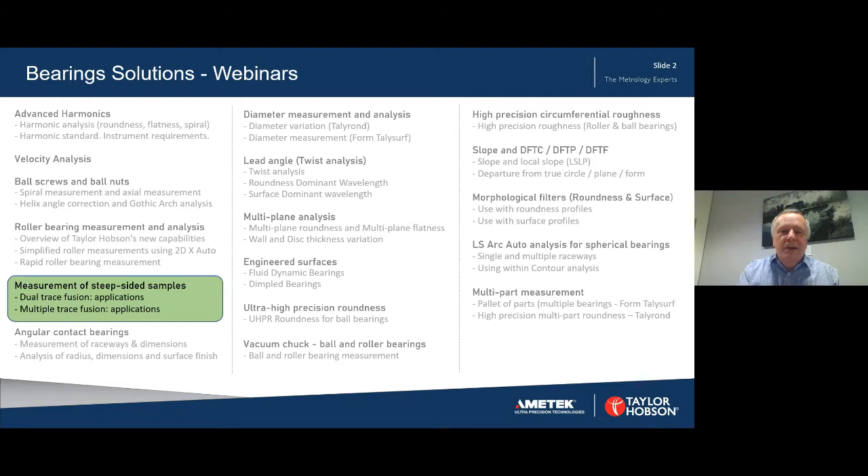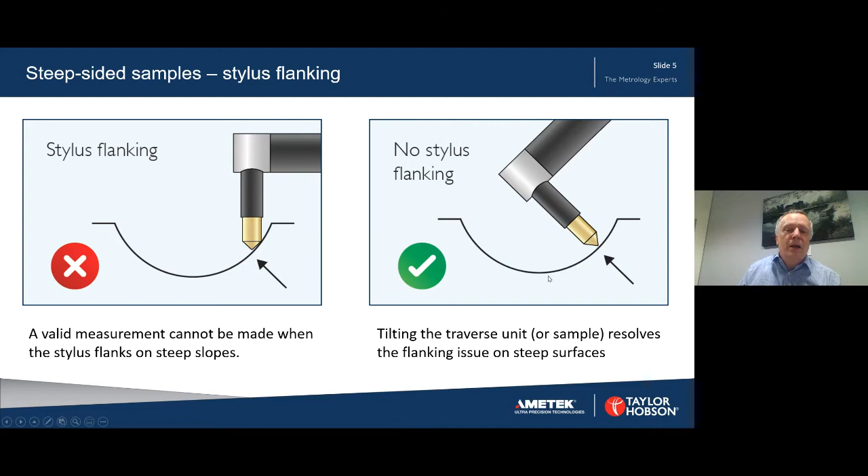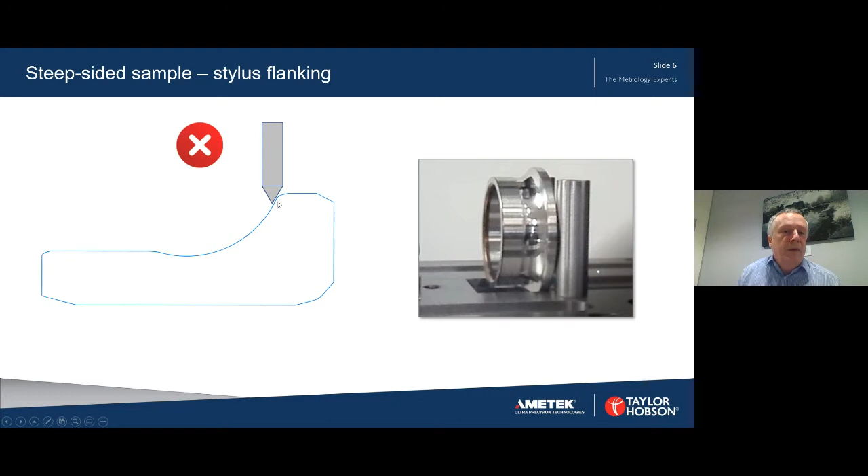So here's an example. This is an angular contact bearing, and in this case we've got it mounted horizontally, and you can see the same thing has happened again. The stylus will have been able to measure along this section here, but when it reaches the right-hand side, flanking will occur, and so the results that we get will not have any meaning. So what do we do? Well, the simplest solution in this case is just to tilt the sample. In this case, we've tilted it at about 45 degrees, perhaps 35 degrees there, and it allows us to measure all the way along the top surface, along the surface here, onto the bearing raceway, and then onto the steep section as well. And let's just have a look at that in practice.

So here's the stylus starting to measure now. And as it comes onto the raceway and onto the steep section, the stylus is able to measure that very steep part of the slope. The important thing to note here is that we're only dealing with a steep slope on one side.

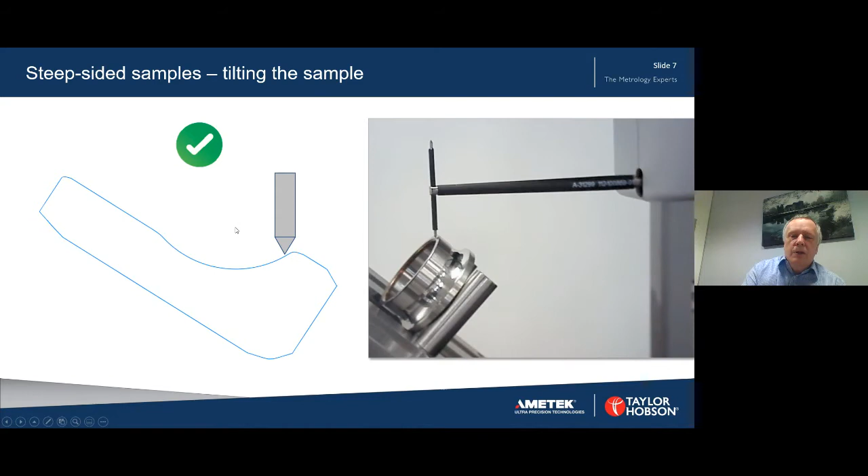So the question is, what happens in other situations where we've got two sides which have very steep slopes? And you can see that in this example here. On the right-hand side, it's very steep, and on the left-hand side. And what we've done here is to tilt the Traverse unit, and obviously we'll be able to measure from the left, just left of center, over onto the right-hand land marked at B.

Well, what we can do is rotate the sample through 180 degrees, and then that allows us to measure the other side. So we've done two measurements. The first measurement from A to B over center, and rotate it 180 degrees, and another measurement. Now, combining those measurements and using Taylor Hobson's Metrology 4.0 data fusion software, we're able to fuse the two traces together. And so this allows us to measure steep sides.

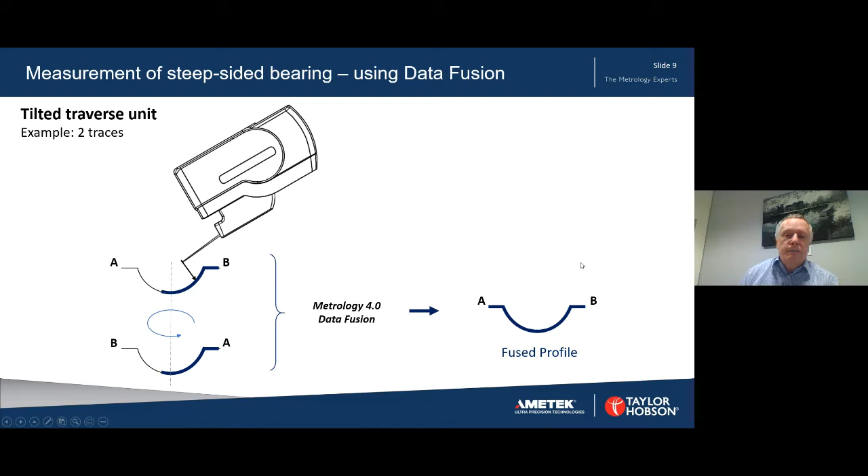Things to think about here are the stages that are used. They need to be good quality stages and well aligned, and the type of fixtures as well. We also need to think about what we're using as datums. Sometimes we may need an external datum on the fixture. The Traverse unit angle chosen will depend on the sample itself, as will the choice of stylus. The PGI Novus system from Taylor Hobson allows us to align samples very, very well. And the smaller the sample, generally, the more important is the alignment.

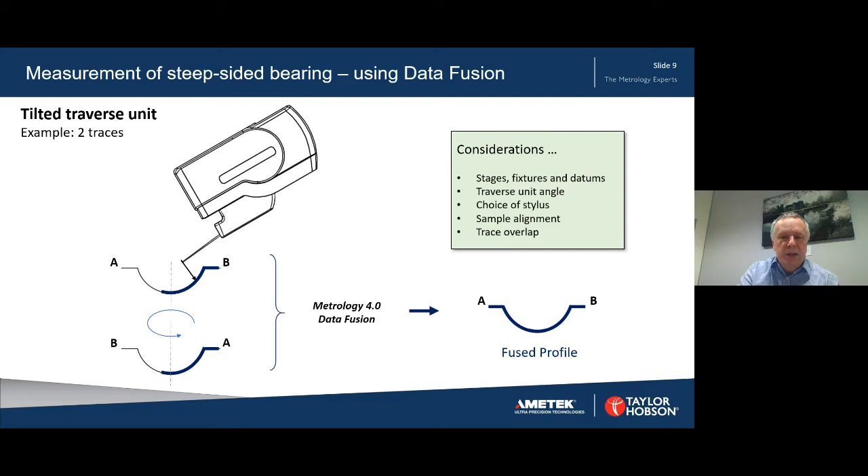The other consideration is how much overlap to do at the center. If we don't go over the center on our measurements, then we won't be able to join the traces together. So there's an example of tilting the Traverse unit and fusing two traces together using data fusion software. We'll now have a look at another example where instead of tilting the Traverse unit, this time we're going to tilt the sample.

And this is a groove in a surface. It could be a sealing surface, for example. And so it's an example of a region on a sample that cannot be measured in a single trace due to stylus flanking. In fact, it's even more difficult than the previous one we looked at, at least it looks like that. It's got 90-degree slopes on the left-hand side and on the right-hand side.

So the interest here is in measuring the width, the drop, the height, and some of these angles as well of these chamfers, and the depth of, and the fillet radii as well. So we want to measure the whole part, but really, even if we were to tilt it at 45 degrees, we'd only be able to measure one side at a time. But by fusing it together like this, we can achieve what we want.

So what we do is we tilt the sample as shown here, and we're able to measure this side. And you can see we've got a tick marked there showing that this data is valid. In this case, this data is not valid on the right-hand side. So that's tilted the sample anti-clockwise.

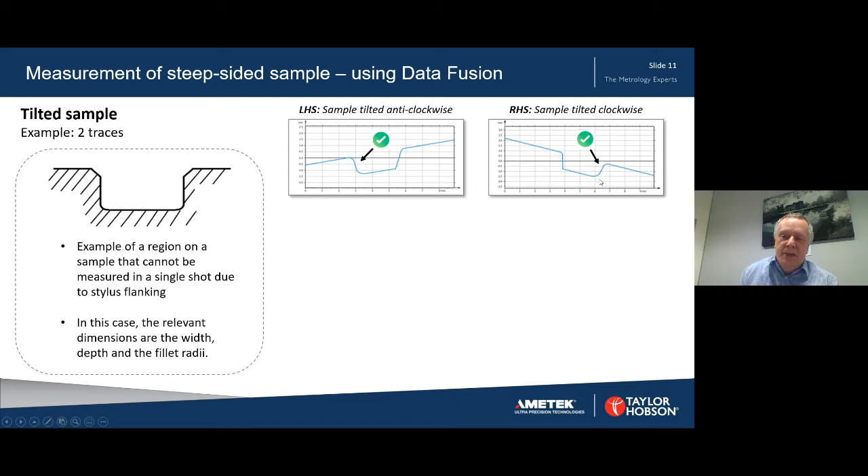We now repeat the process and we tilt the sample clockwise, and we're able to measure on the right-hand side here, the right-hand side of the slope, that data is now valid, and the data on the left-hand side is not valid. Using data fusion software, we're able to combine these two traces together to get exactly the result we want. And here's the completed profile.

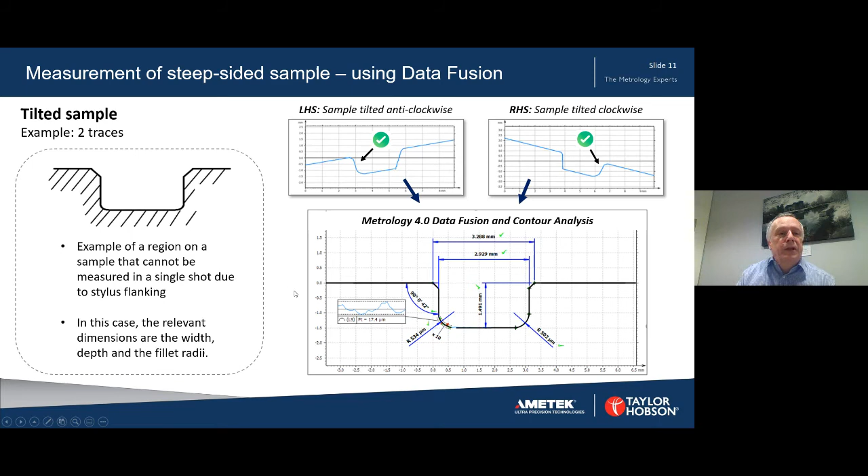So we're looking at the distances, we're looking at angles, we're looking at the fillet radii, and also you can just see there we've got some tolerancing done, and we've toleranced the fillet radius, and we've looked at the form error. In this case, it's showing it's 17.4 microns. So this example was tilting the sample. So we've looked at tilting the traverse unit, and we've looked now at tilting the sample.

So now, finally, we're going to have a look at the demonstration of using the data fusion software. And in this case, we're dealing with some very steep-sided grooves, between 70 and 80 degrees. And these are the sorts of grooves that could be used in a typical fuel cell, but not necessarily just that application. It could be many other applications, anything with steep sides. But the central region is quite big here and quite flat. And so instead of fusing two traces together, in this case, we're going to fuse three traces.

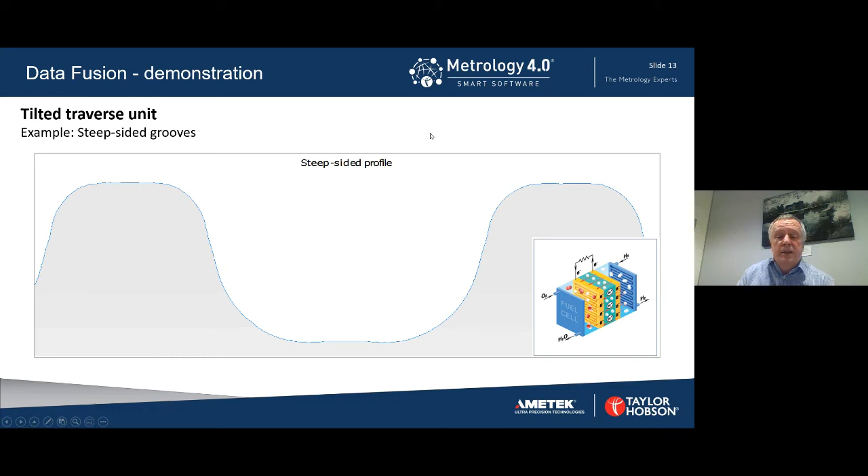And what we're going to do is to take three traces, one with the traverse unit horizontal, and we get this result where this data that I'm pointing to now in the center is valid. And then we tilt the traverse unit again at about 30 degrees, and the data on the right-hand side is valid. This data is not valid. And then we rotate the sample and we measure again, allowing us to get the data for the left-hand side.

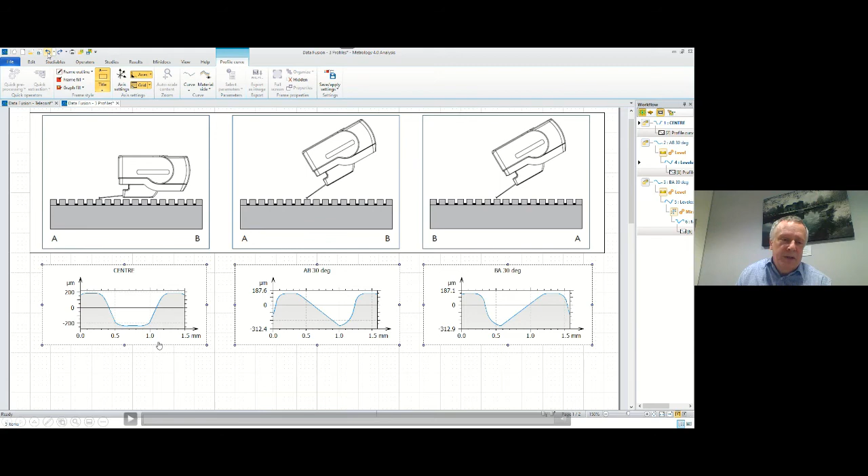So we've got three pieces of data that are good: the central trace here, the right-hand trace here, and the left-hand trace here. And what data fusion does now is to fuse these three together. And we'll just take a look at that.

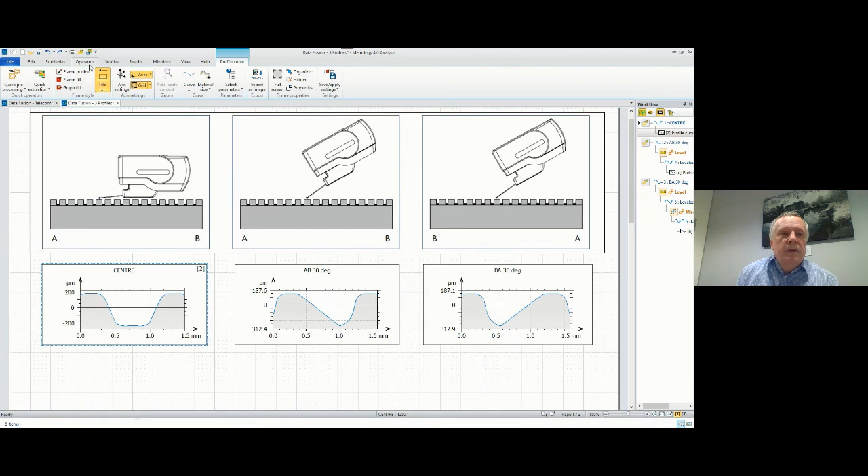So in Metrology 4 software, we're showing you the process. This would be fully automatic. We're just showing you the process here. So what we've got here is two traces. And we're going to fuse the right-hand trace to the center trace. We automatically detect the traces and we carry out the fusion process, and there it is. The result then appears.

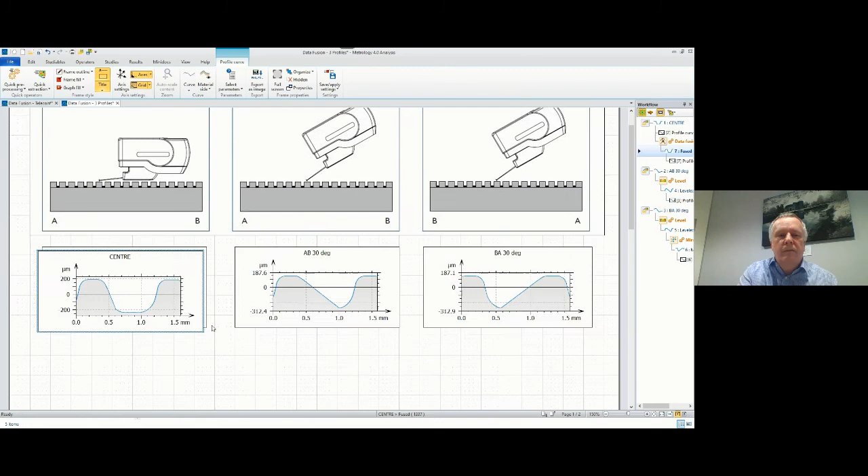So what we've done so far is to fuse just two of the traces. We've fused the center trace to the right-hand side trace, but we've not yet done the left-hand trace, and here it is, the one we now want to fuse to this. So this is the second operation. As I say, this would normally be automatic. I'm just showing the process here.

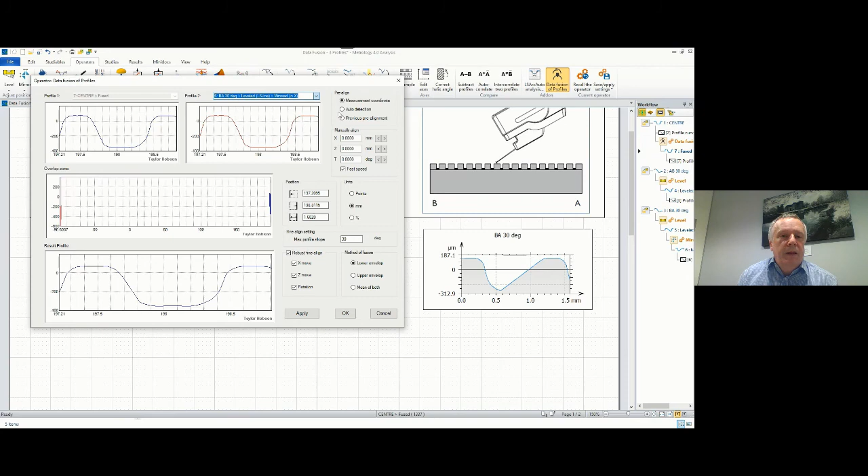We're now going to fuse these two traces together. We select them. We activate the data fusion. There are the two traces at the top there. We automatically detect them and we fuse them together. And finally, we have the result that we want there. So there is the full profile with valid data all the way around these traces.